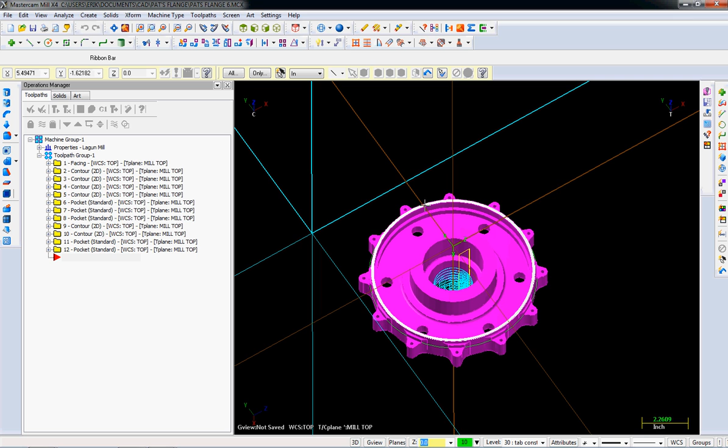First thing we're going to do is prep for drilling these holes. If we just go and drill them, we're not guaranteed as well as we'd like the location of the hole. So the best idea is to spot drill first, using a real rigid spot drill. If you're using a stub drill or a carbide drill that's pretty rigid, you can probably get away without spot drilling, but it's good to learn how, so we're going to do it in this video.

So first thing we do, it's real simple. We already made the spot drill, the 1/4 inch 90-degree spot drill tool, in an earlier video. So you select tool paths, drill.

Before I start that, I'm going to point something out that I've been doing poorly. You can't really tell what the heck each one of these paths is. So if I go in here and pick this one, I'm going to turn on the tool path so we can figure out what it is. Okay, so this is the bottom bore. We haven't been naming them, and if you have to go edit later, this is just a nightmare. You can see there's some logic, they're grouped up, but that doesn't really help you a whole lot.

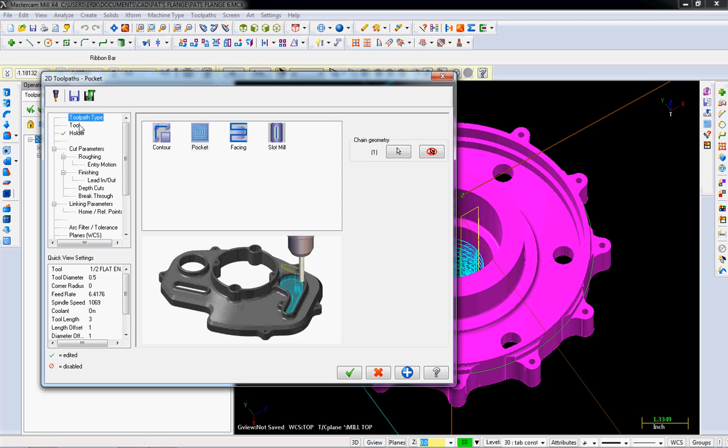So parameters, to name it after the fact. The next one we're going to name before we're done. For some reason the comment is always in the tool—I don't know why it's in the tool, but this is where you name it. So I'm going to name this bottom bearing bore. It's up to you to make a name that's sensible to you, maybe you like abbreviations, it doesn't matter to me, I just want to show you where it goes.

Say OK, and when I close this down, you can now see bottom bearing bore, and this one is going to be the top bearing bore. Let me turn off the tool path first. The other thing you can do is click on it once, click on it a second time and wait, and you can edit it directly here. So there's top bearing bore. Now we can tell these two apart, and really I should go back and fill all these in, but just to keep going on the video, I'm gonna go back to doing the spot drill.

So here we're gonna pick tool paths, drill. And drilling is super easy here. You can use this, which is just go select anything, but that means I can select one of the problems here. I'm going to zoom in so you can see it better. One of the problems with this select-anything idea is that I can grab, you see I can grab the circle, and right now it's highlighted to the center. That's great, that's exactly why I want to drill.

But if I move over here, look at that, I actually grabbed the corner. This is in a quadrant, so I guess I could do the same thing over here. So I can have a problem where right now I'm grabbing, I would be selecting on the circle, not in the center of the circle, and then if I move over to the side, I select the center of the circle, and that's just really easy to mess things up.

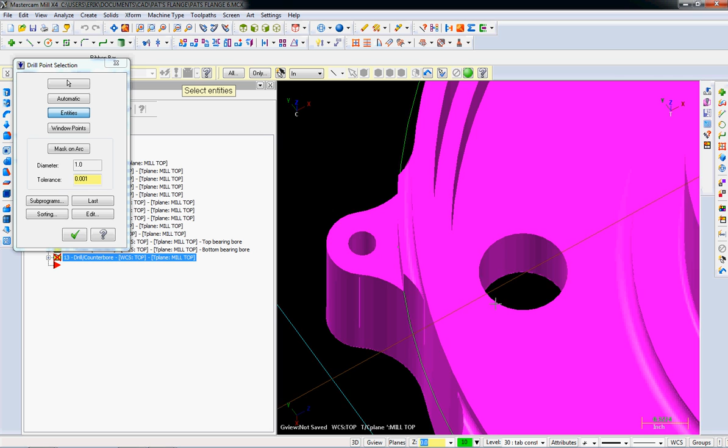So what I tend to do is I select entities, and when you select the circle, it will understand the height and the center of the circle automatically. Makes things a lot easier. Because doing CAM is not about getting it right once, it's about getting it right every time, over and over efficiently, so you can get your job done. So I'm gonna pick this circle, and this circle, and you can see they're getting highlighted. Hopefully that picks up well after this thing is recorded.

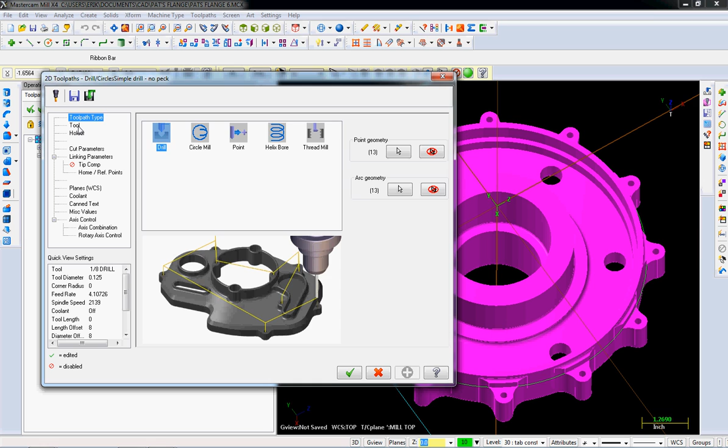And so there I go, pick all the circles. Piece of cake. And then I'm going to go toolpath type, drill, which was already selected. It doesn't show well until I click on it again, even though I can see it's got a light gray selection. Tool, 1/4 inch spot drill, and it doesn't really matter. You've got a 1/4 inch, 3/8, 1/2 inch spot drill. As long as it clears, it'll be fine.

Holder, we're going to do the same Cat 40 ER32 that we've been using before. Cut parameters. I'm going to do a drill counter bore, and you can see this is what we want. We're going to do spot drills, just give me a dimple, and it'll be fine.

Dwell, this is how long you actually spend at the bottom. It's probably a good idea to do a dwell. I just don't know how long of a dwell we should put in there. I think the ideal is for a one fluted drill, you should be dwelling 1 revolution at least, so you don't end up having a chiseled feature at the bottom. I'm going to ignore it now, but I do want to point out where it is.

Linking parameters, it's just like everything else, is super important. So I'm going to zoom in. Here's one instance where the center and the side don't matter because they're the same Z height. I select there. Top of stock, well, top of stock's right there. We don't want to spend all day going at a drill feed rate down.

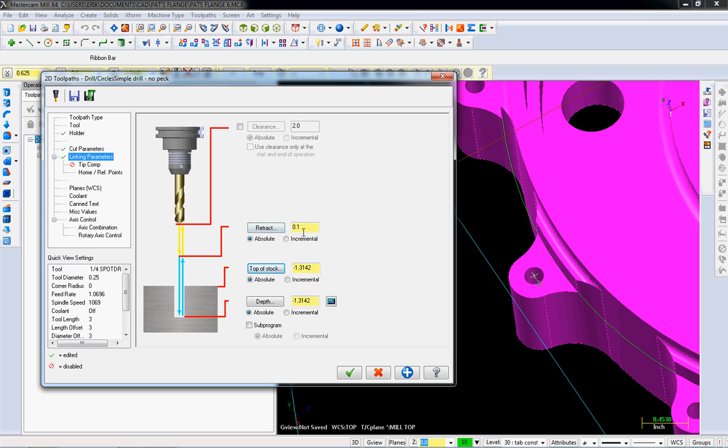At this point, we've got everything featured except for the hole. So let's pick the top of the stock where it is, and then retract absolute. 0.1 is fine because we know that the top of the stock is 0, and that's another reason to have the top of the stock be at 0.

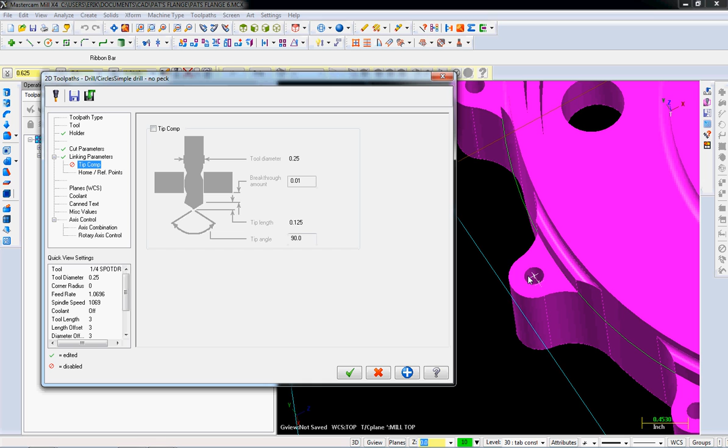Tip comp. Now, if we were drilling a through hole, which we will shortly, we want to understand the tip angle, and we want to make sure that we go through this amount here. We don't just want to drill through and have the tip just dimple the edge on the other side. We want to get the drill all the way through. So we would let Mastercam understand the tip angle of our tool and the diameter, and calculate how far extra we have to go through. And then in addition to that, we'd have a breakthrough amount. But given that we are dimpling right now, just using a spot drill, we don't want to do that.

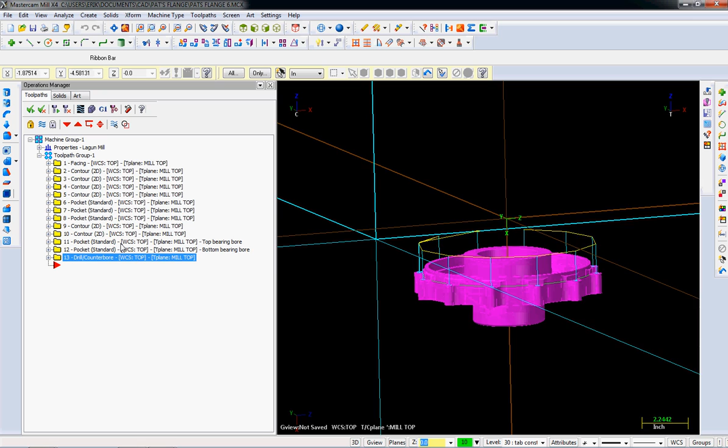Planes, it's right. Occasionally I'll do things between videos and I just want to make sure I have it right. So mill top is correct, and then of course coolant on, and say OK. And if we zoom out, you can see that the tool paths when you're drilling are real simple, as opposed to what we've probably been getting used to seeing, all these really fancy intricate tool paths. So it's nice and simple.

And I get, you know what, I forgot one thing really basic. We drilled to the surface. We didn't actually drill meaningfully. We didn't drill into the part. So the depth that I chose was the top of the part, and I totally boneheaded and forgot to drill the depth. So I'm going to drill 50 thou in.

Now, there's some method to the madness here in how I'm drilling 50 thou in. If you have a 90-degree spot drill, the diameter is twice, and you haven't gotten to the body of the spot drill, you're still in the tip. The diameter that you drill, kind of the chamfer diameter, is twice the depth. So if I'm drilling 50 thou deep, I'm going to have a 100 thou diameter hole, and that should be good to catch the tip of the .201 drill that's going to follow.

To do a really good job, typically you want to have a larger angle on the spot drill than on the drill, and in aluminum we're probably going to use a 118-degree drill. So 90 is not the best. We probably want a 135 or something bigger, but for cam purposes it doesn't really matter, and you really need to go and look at your tooling and make good decisions. Cam does not make you make good tooling decisions. It just allows you to use your tool efficiently. So if it's me, I'm probably looking for a 135-degree spot drill, so that the 118-degree tool will center properly. Otherwise it's going to kind of bounce around that circle that it's going to run into.

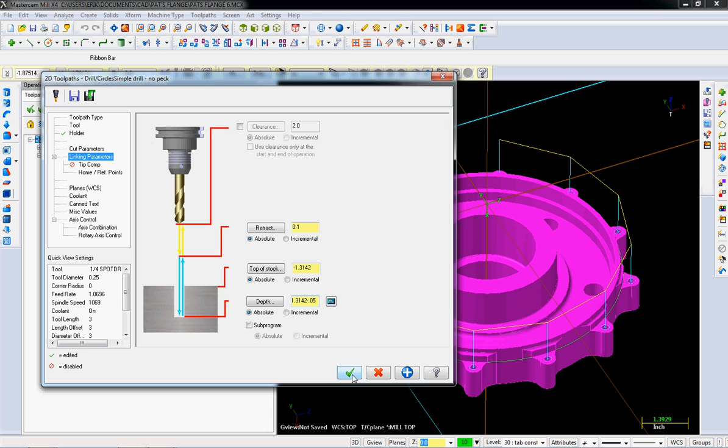But the cam is exactly the same, minus the tool creation and setting that angle. I'm gonna say OK.

So I caught this error before I verified, but how would you catch it when you verified it? You'd run it and say, whoa, I just ran my verify, and sure enough, I didn't see any cut happen. I saw the drill go all over the place, but I didn't get a dimple. So I just caught it in my head before it happened, but you can catch it. The whole point of verify is to catch that kind of stuff.

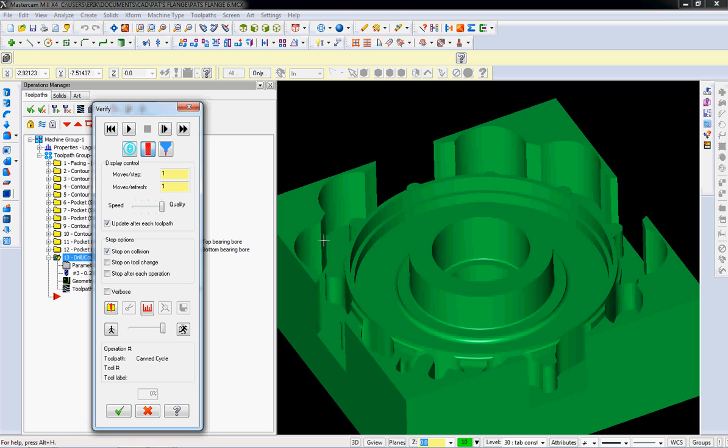So you can see I have the newly bored out STL model that I saved from last video, and I'm going to run this, and there you go. There is our spot drill. So this STL comparer, we're going to use that shortly, but not right now. So I'm going to get out of here, turn off the—and sure enough, I told you I was gonna

label these cam operations, but I didn't. So: spot drill, 1/4 20s. You need to name it something meaningful for yourself. That's good enough for me, but it may not make sense to you. So make sure you pick something that makes sense to you.

So now we're starting to get these labels in here to help us understand what's what. Okay, so just another random lesson: we can select all operations, and we can select all dirty operations—if there's no dirties, that's a good way to select none. So sometimes just getting used to these hotkeys can make things simpler. One way to select all and select none really easily is to use these two. Even though technically you're selecting dirty operations, you shouldn't have dirty operations sitting around normally.

Okay, so now let's do a cut and paste of this last one. Control C, Control V. Now, why are we cutting and pasting this? Because we are going to drill the 0.201 through holes that we just spot drilled, and that keeps us from having to go up and fill things out. It's a very minor time savings, if any, but it's also good to see an alternate way to do things.

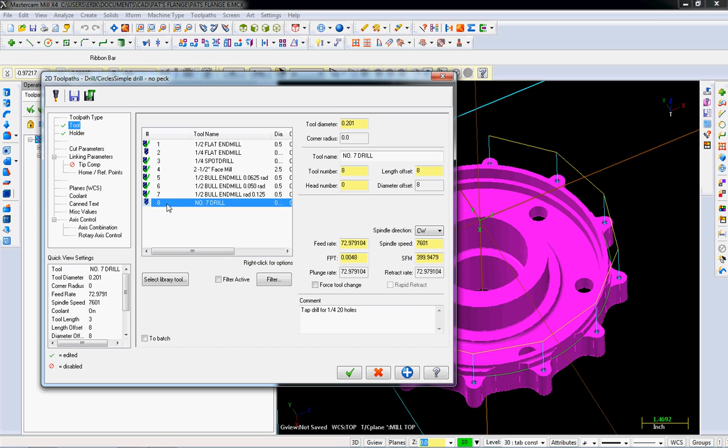And if we make sure these are in order, you definitely don't want to have duplicate numbers here. That can cause all sorts of strangeness in Mastercam. It should take care of it for you, but it doesn't hurt to look over the shoulder at it.

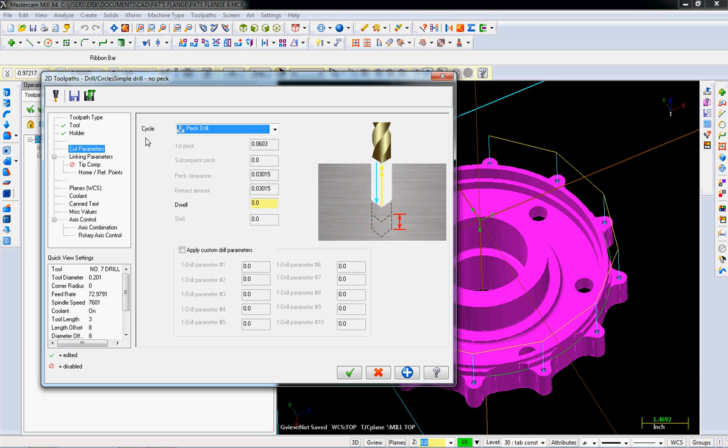Holder—we got that left over from last time. Cut parameter, peck drills—that makes sense for a standard drill. And let's see, why are we—for some reason we don't have the peck setup. Well, we'll take a look at that later.

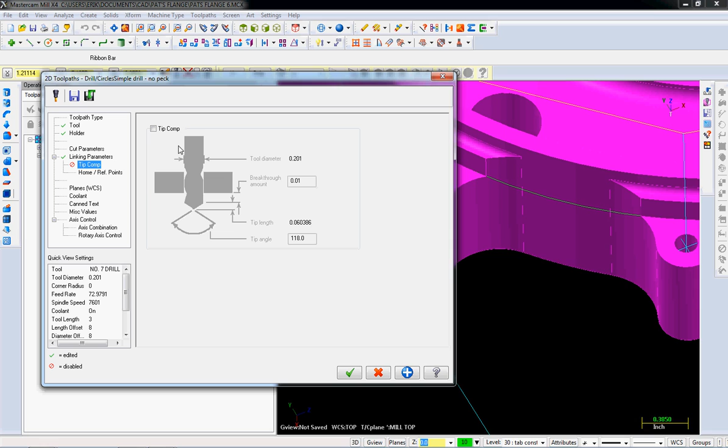Now the linking parameters: the depth—last time I selected this height and subtracted 50 thousandths from it, and that was fine for the spot drill. But when we are doing a through hole, we know we're going to go to the back side, so we're going to click that. Top of stock is still in the same place. Now this is where we want tip comp. It knows that the number 7 drill is 118 degrees, and I'm going to say I want 50 thou breakthrough, but it's up to you.

10 thou is probably fine, but 50 thou is probably fine too. And then planes are okay, and let's turn on the coolant. Okay, and then we regen.

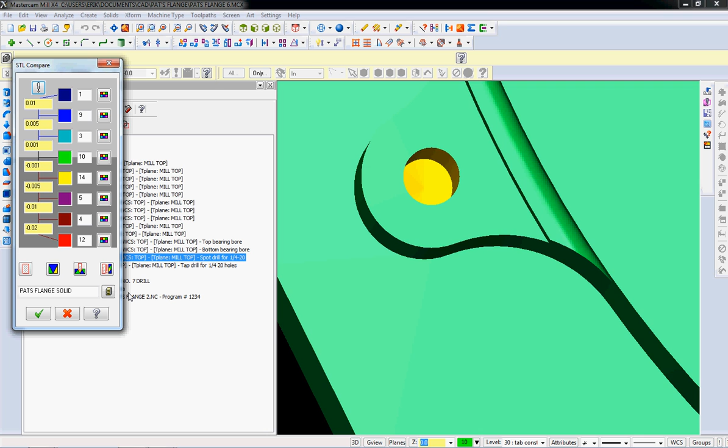Now I'm going to select both of these, and then let's verify. We should see that first we spot drill, and now we do the through drilling. And sure enough, it's not through, but that's because we have not machined the back side of the part away. So that looks okay.

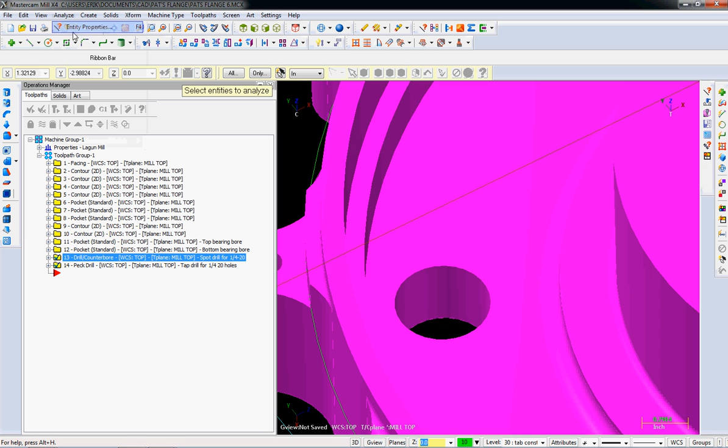And then we need to cut these wheel stud holes. Those are going to be real simple. We're not going to drill them, because I believe they're 5/8 inch. Let me turn off these tool paths. Let's actually go and measure those.

So, analyze entity property, and I'm going to wireframe it so I can choose the circle instead of the solid feature. Where's our diameter? Yep, 5/8. So we can helix bore that with a 1/2 inch end mill.

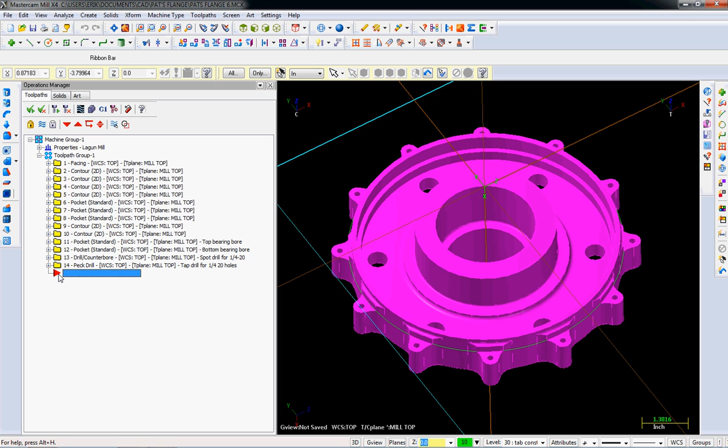That's going to be a nice sturdy end mill, and it will do a great job. So I'll show you how to do that. It's really similar to drilling. It's not drilling, it's a different operation, but it's picked in a very similar way.

So, tool path, circle path. We could do circle mill or we could do helix bore. Circle mill will cut in levels - I'm going to dramatize with the mouse. It'll go into a lead in, do a circle, do a lead out, then go down, lead in, circle, lead out, and that works fine.

Helix bore is another way where it kind of corkscrews its way in. And really, aside from picking the parameters for a circle mill and helix bore, they're just like drilling. So I'm going to pick a helix bore, and it's going to want to see drill point selection. This is just what we did earlier - I want to use entities rather than features, because that keeps me from accidentally picking the side of a circle instead of the center.

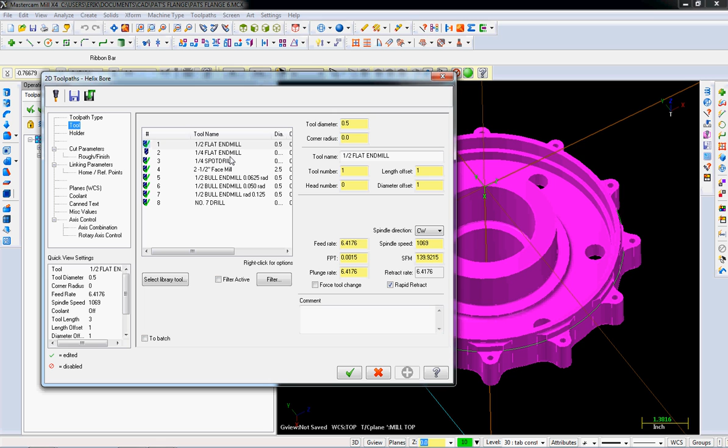So I picked those 6. Okay, and we are going to helix bore - that's already chosen. Tool, we're going to use our 1/2 inch flat end mill. Pick our holder like we've done so many times before, Cat 40 or 32. Getting good at saying that.

Helix bore is like a contour, so we're going to see real similar things. So I'm going to use wear, nothing on the walls, rough finish. We're not going to have to worry about a rough finish in here. It's a 1/2 inch end mill and a 5/8 hole. It's not exactly taking the biggest cut in the world, so I'm going to not turn on a finish, though you absolutely could turn on a finish and change your parameters in there.

When you're helixing, you do have to pick how far down you go each time. This is 80 thou. I'm going to leave the default because I don't know a better number right now, and I want to focus on the video. But definitely think about appropriate step down - that's a good place for machining calculators to help you out.

And I'm going to go to link parameters. So depth is important to pick on this one. We're going to want to go pick the bottom. Now, I could have picked any of these features, but I just haven't looked at the bottom in so long that I wasn't sure, so I figured I'd take a look. So there's the bottom.

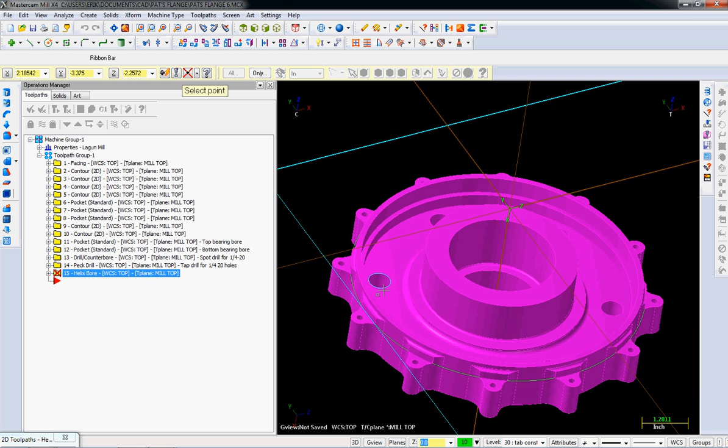And where's the top of stock? Because we are fully machined except for this hole, so we know that this is the top of the stock right here. And if you see, the center is deep in there, so even though it looks like I'm picking the top, I'm actually picking something below. So be very - I'm going to give you an example of do what I do, not do what I say.

I'm going to zoom in and actually be very careful about how I pick the top of the stock. Now I can see when I grab the circle, the center's right here. That's good.

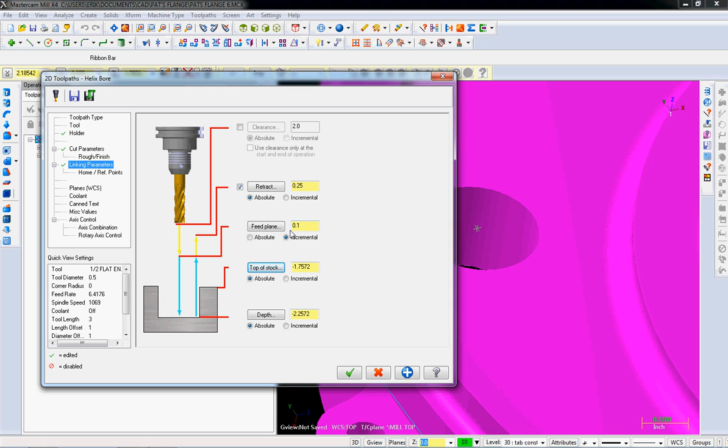And feed plane is a little higher. Actually, that feed plane, I want to be careful on that. I want to pick an absolute higher value, because if Mastercam gets crazy and decides to cut this circle and then this circle and it feeds, it's going to crash right through.

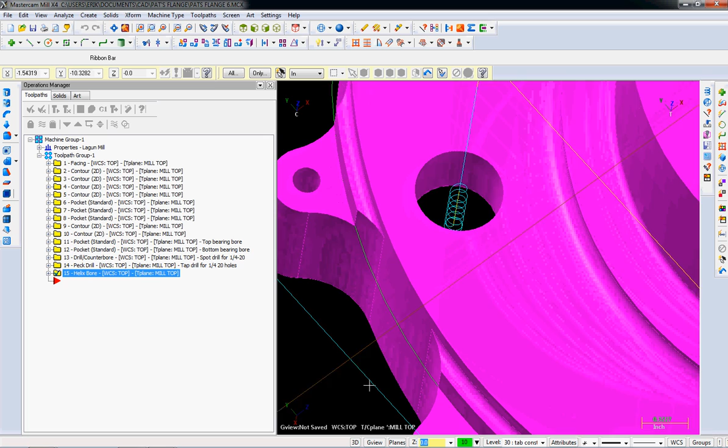That's no good. So I'm going to pick this as my feed plane plus 0.1, and that'll be good. Could have just thrown in 0.25, would have been fine - it would have gone up a little too high, but that's okay. But always be thinking about these 4 numbers and get a good understanding of what they are. If in doubt, experiment a bit. They're not complicated numbers, but until you get used to them, they can seem a little daunting, but they're really not tough. And then coolant on, always on.

Say OK. And then if we look very closely, you can see that we're helixing into through those holes. And I bet you we forgot to put a breakthrough on there. So let's go in here. Oh gosh, does this thing not have a breakthrough?

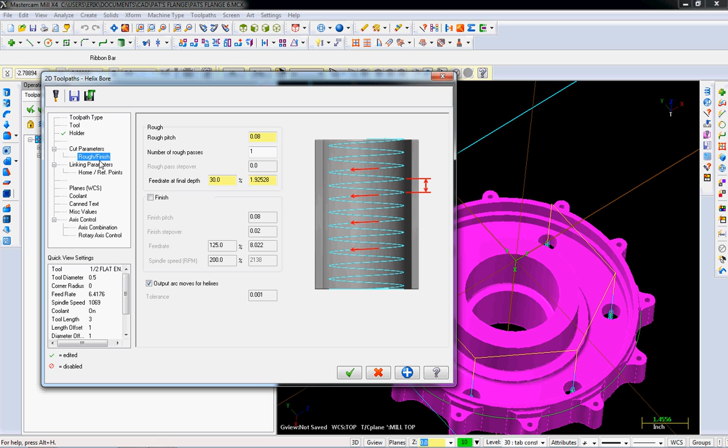Okay, so it doesn't have a breakthrough. Here's an example of, I really wish it had a breakthrough, but I'm not seeing one. Maybe I'm just looking over it. But easy enough to fix.

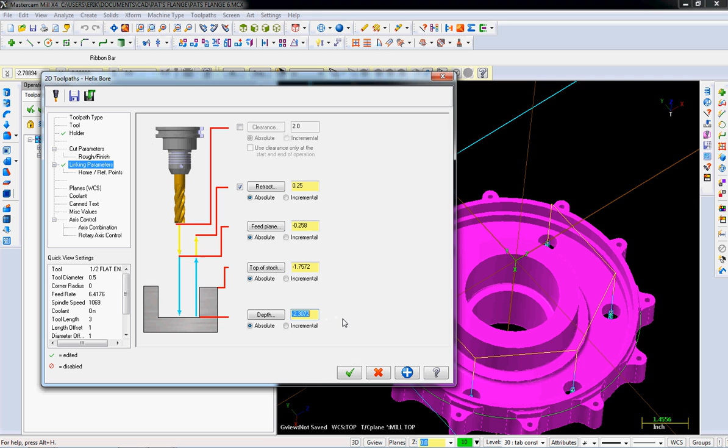Go into the depth, minus 0.05 at the end, do your math. I'll actually let Mastercam do the math, and there you go. Now you got a breakthrough of 50 thou. If you ever try to go figure out where this number came from, it's going to be tough to figure out, but you can always just go select the bottom of that hole and subtract out 50 or 100. It'd be nice if it was separated, to have a separate breakthrough, but it's fine.

Okay, and then we're going to clean that dirty operation. And how do I know I need that breakthrough? Well, it's just a matter of, those are the things that go through my head. That's really not a tough one to go fix after the fact in your machine if you need to get a deburrer out, but it's nice to get it right the first time, and just always be thinking about where you start, where you end up, the quality of all those cuts.

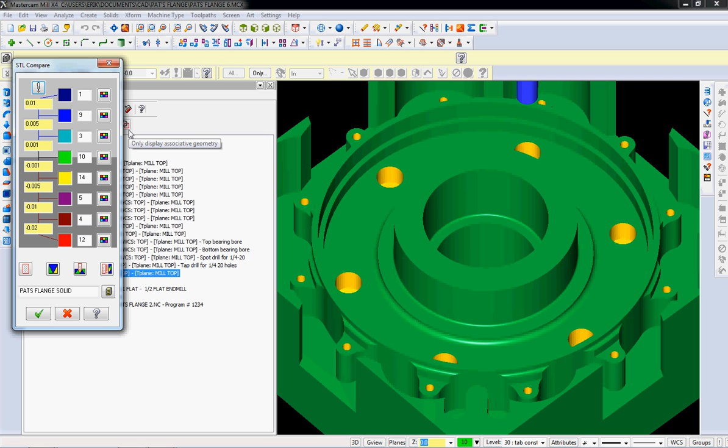So let's verify those last 3 operations, and there's our spot drill going around, and here's our drill, and here you go. You can see that we're helixing in for those 6 holes. Now the verified isn't really designed to be a great network television quality animation of what's going on. You can't see that that's a helix, but it's okay.

It's the verify that is very accurate. It just doesn't always - you don't see nice neat helixes when it goes in. But I've had real good luck with it predicting surface finishes when you're doing weird 3D shapes and that sort of stuff, so don't get too concerned about that.

Now we've finished the entire top of this part minus doing the boring, and so I'm going to save this as another STL file, which will be really critical for doing tooling for the other side. So save that, and then I'm going to do one more thing here.

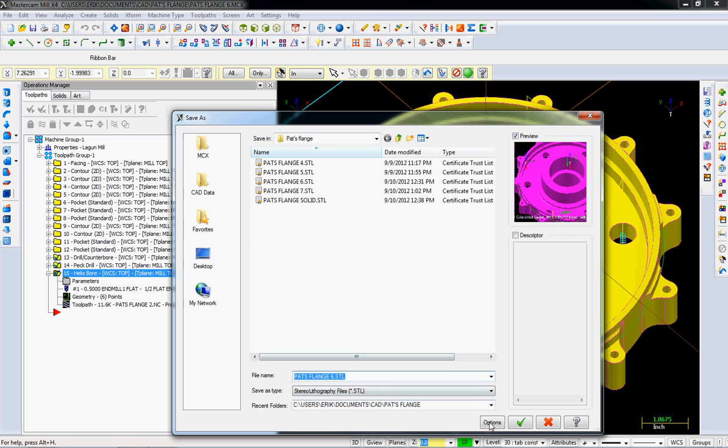Really powerful feature that you can use in Cam is you can go and do File, Save Some, and I'm going to save an STL file of this solid. Now we already have a SolidWorks file of it, but I want an STL file, and you'll see shortly why. So I'm going to not save this as an MCX. I'm going to save this as an STL, and I've already done it, but I'll save over it and say yes. Now why am I doing that?

If I run a verify, you've seen that another screen pop up at the end that may not be on yours, I have it defaulted on. Check compare to STL file, say OK, and then let's run our machine verify again, and we'll wait for it to helix away.

What we're going to be doing is comparing the actual machined simulation to the STL of the model. So if we made some error in machining depths or diameters, it'll show up when we do an STL compare. It's already chosen because I've done this before the video, but let's say you just open up the little file drawer icon, Pat's flange solid, OK, and now you click this, which is compare the 2 files, and it'll show up in this heat map.

Oops, oh, there you go, I did it wrong. Well, here's a good example of what not to do. I saved the STL incorrectly, so let's go fix that. Just computer's hung for a sec. Let's give it a minute to think about what it's done. I'm going to pause the video here while it thinks.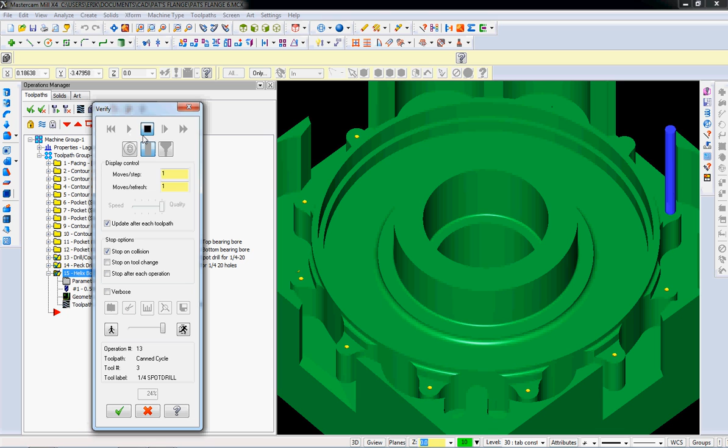So let's do some save some again, and let's save as an STL. We just went through this. I want to replace that. Now we're going to do - I don't have to put us back in the Cplane of the mill top, but I'm going to do it because otherwise I'll just forget and it'll come up again later. So I'm going to verify this. Just to speed it up, I'm going to change the moves per refresh.

Just give it a minute to work through these helices. The helix boring is a little slow on verify. It's not too bad, so it's also a good reason to save your STL file so you don't have to wait for this stuff all the time. And let's compare.

Okay, so this is really neat. This is a really, really neat feature I really like. You can see that the heat graph here, green is good, and it's telling us that we have no error, and then you can see the varying colors as we change. 1 thou of error will be yellow and 5 thou will be purple, and you can see we're perfect.

We get some modeling errors here. 1 thou is actually the tolerance on the STL and a lot of the machining simulations, so 1 thou doesn't bother me at all. But oh, look at this, we have these huge blues in the bearing bores, and the reason we have those huge blue sections is we left 50 thou of stock on there for boring later. But having said all that, we're in pretty good shape.

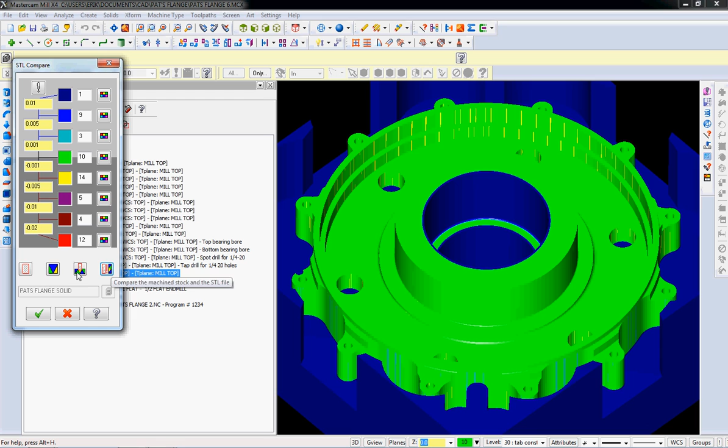Now I'm trying to rotate it, and it barely rotates. So a big tip is, for some reason when you're doing the STL compares, it's super slow. So go back, if you want to rotate it, go and look at the verify, come over here, and let's rotate. At some point it'll catch up.

I can see my CPU's pegged right now between recording videos and trying to do CAD. It's a little rough on the computer. I'm gonna pause again while we wait for the computer to catch up.

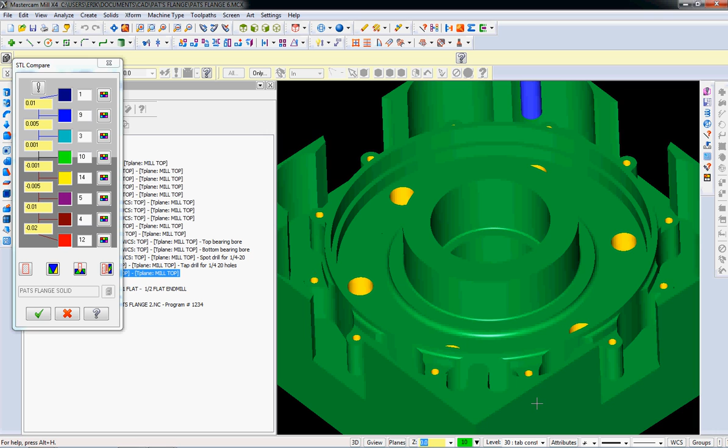Okay, and I'm back. For some reason when you're doing STL compares, if you never start the STL compare, the computer's real fast, but once you do the STL compare, I think it's just brutal on memory and all sorts of other stuff, and sometimes it takes a while to come back.

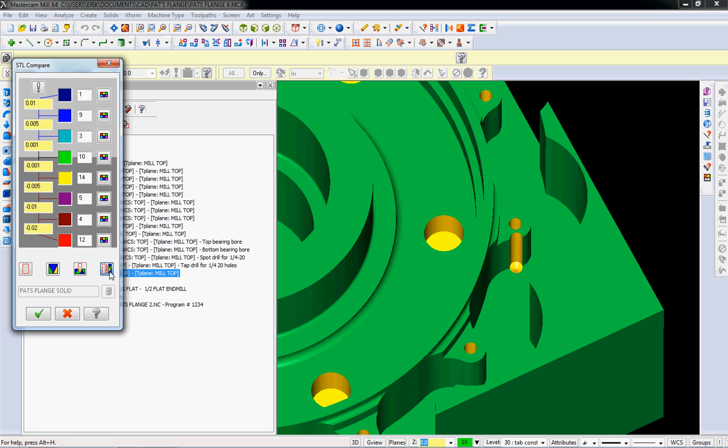But if you want to rotate around, like I thought I saw something in the STL compare, but I couldn't rotate it to look at it. I thought I saw a problem here, and sure enough, that is a big old honkin' problem.

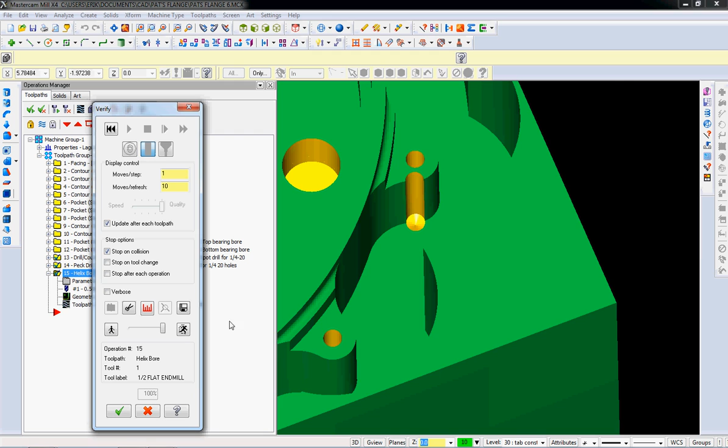We can do an STL compare, and we can see that sure enough that thing is just gonna be blown out and all sorts of weird colors. There's red. Red is bad. So I'm gonna close this out, and that's the only error I saw that was egregious.

And that's, to me, that is very clearly, and just I was spinning around just to take a look, one extra hole. So somehow we chained an extra hole in there.

So Helix bore, let's go to a peck drill for the tap drills, and 13 points. Sure enough, there's a point right there. So let's see if we can, let's see, there we go. It's point, not 3, point 2. We can see that little guy right there.

So let's delete him, delete points. Let's see, I don't think that worked. Delete points. Delete point 2. For the life of me, I can't figure out how to do this. But we need to delete you. Oh, that's right, we need to go click on it. Delete that guy. He's out. Now we've got 12 points.

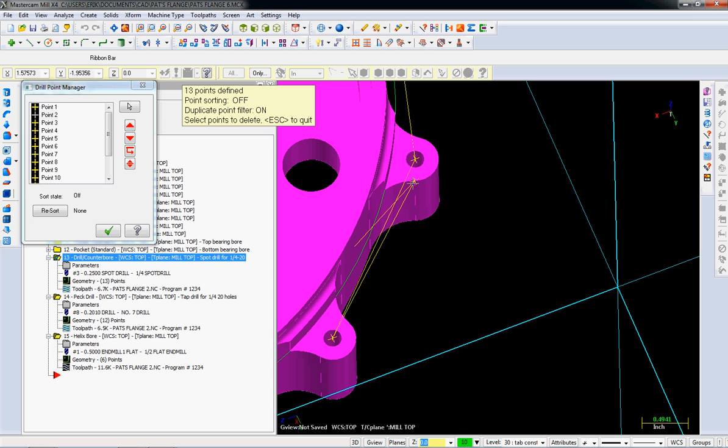Now we're going to rechain it. And I suspect since we copy and pasted above, we have the same problem here. We are going to just double check it's point 2. Sure enough, let's delete points. Delete that guy, he's out. Okay, rechain that.

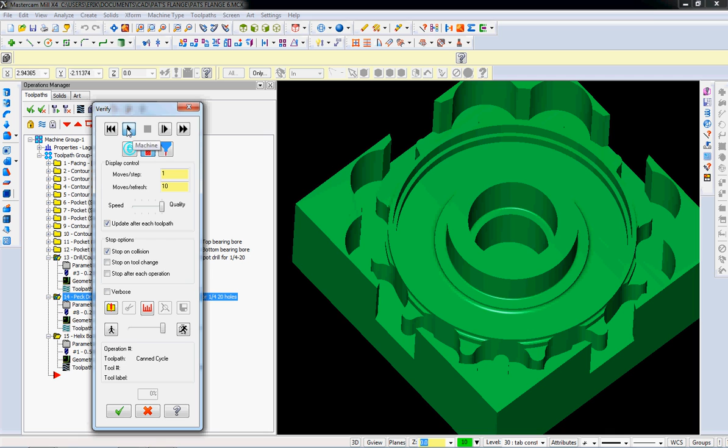I don't want you to get the idea that this stuff is always flawless. It's super easy to make tiny mistakes, and you have to be very diligent about looking for them. If you don't look for mistakes, you're not going to find them until you cut them, and then you have $100 of aluminum vaporized in front of your eyes as you put a hole in the wrong spot. So let's double check.

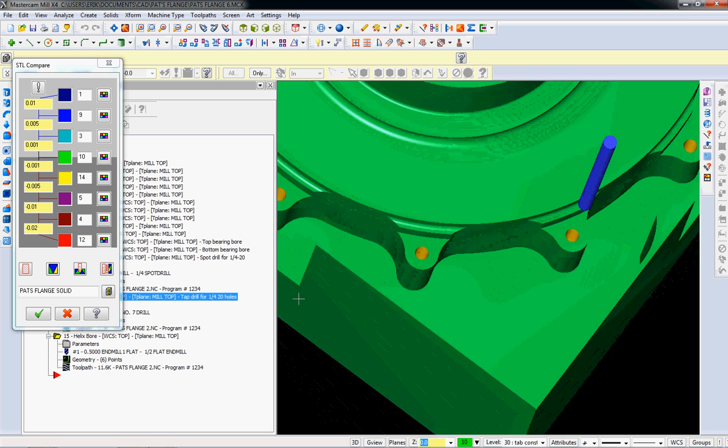There we go. And I want to go around and spin this guy so we can look at all these holes. And I've got one of these 3D mice. It's a 3Dconnexion, I think it's made by Logitech. I think they bought the company that used to make this stuff, Space Pilot or something like that. Really like this thing. This is hard to do with the mouse, but you can do it pretty easily once you get the hand-eye of this thing.

So that looks great. And we can do the STL compare, and it looks good. Okay, that's excellent. So I'm going to close this guy out, and next video we'll talk about doing a boring operation down the middle of this guy, and we'll be completely done with the top of this, which will be fantastic.